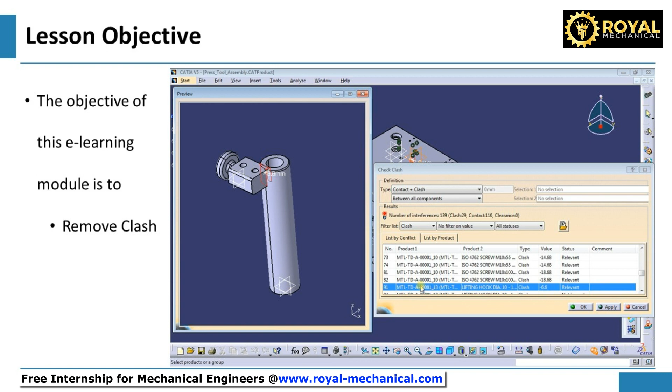In the previous e-learning module, we had identified two critical clashes. Number 1, remove clash between the locator pin and the stripper plate. Number 2, remove clash between the stroke end block and the lifting hook. First, let's remove the clash between the locator pin and the stripper plate. Let's create a relief hole on the stripper plate to remove this clash.

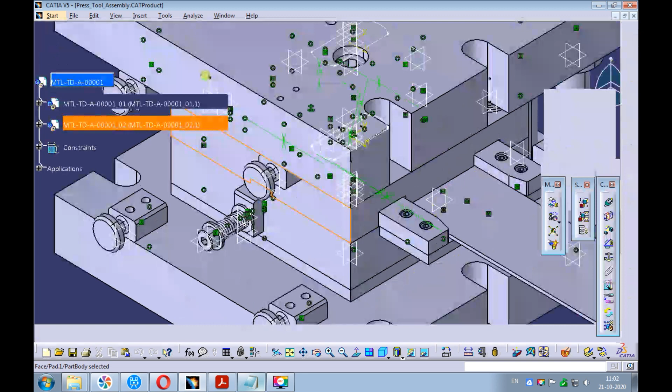Right-click on the stripper plate and open it in the new window. Swap the window to the press tool assembly. Right-click on the die plate and open it in the new window. Edit the definition of the locator pin's hole.

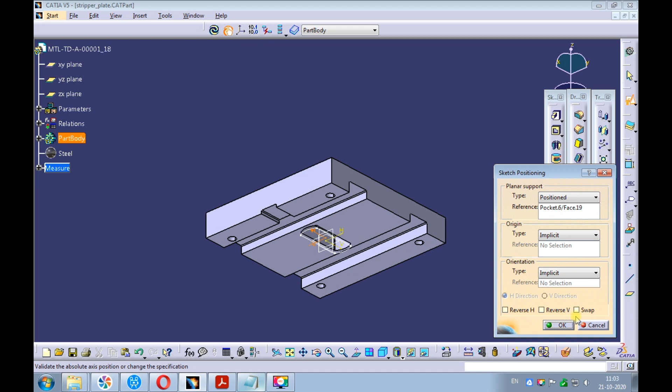Double-click and copy the horizontal distance between the center of the hole and the vertical axis. Swap the window to the stripper plate. Create a position sketch on the stepped surface of the stripper plate, which contacts the strip. Sketch a circle.

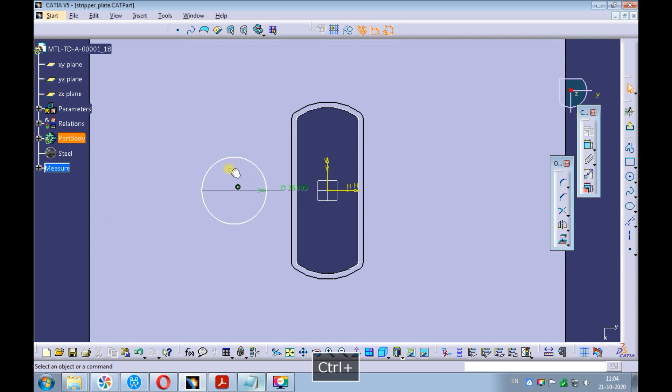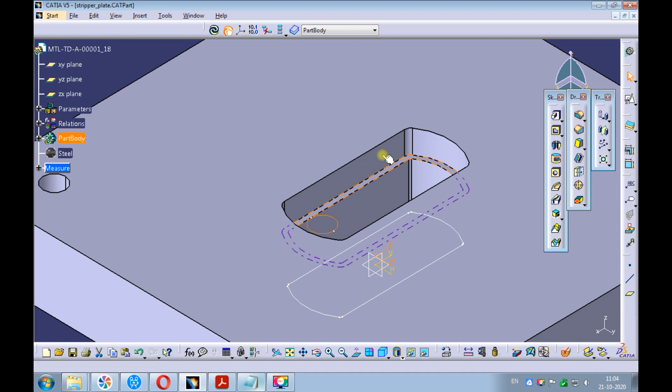Create a horizontal dimension between the center of the circle and the vertical axis. Update the dimension. Paste the copied dimension from the die plate. Make sure the sketch is fully constrained and exit the Sketcher workbench. Swap the window to the die assembly.

Measure the diameter of the locator pin. The measured diameter value is 16 mm. Measure the distance between the top surface of the strip and the top surface of the locator pin. The measured distance is 1.85 mm.

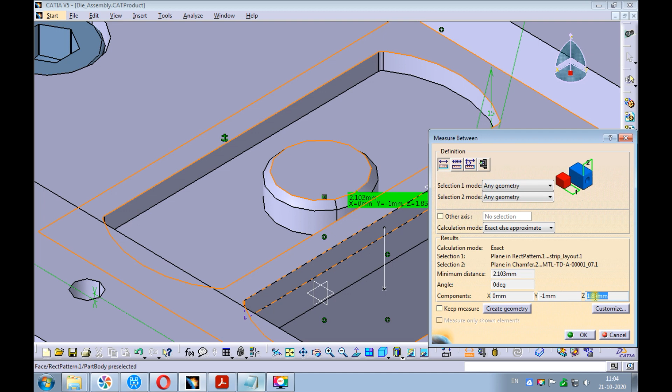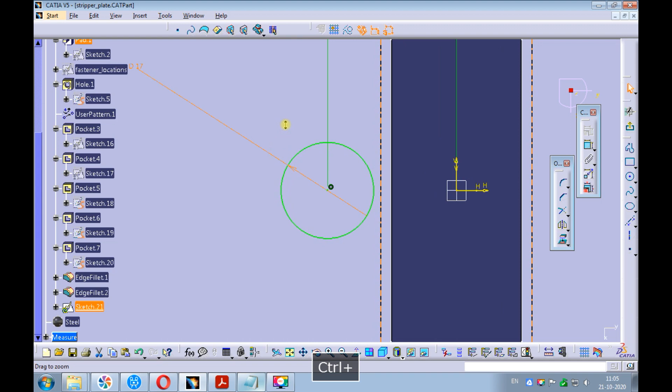Swap the window to the stripper plate. Edit the sketch created earlier. Update the diameter dimension to 17 mm, 1 mm more than the locator pin diameter. Create a pocket with a dimension option. Enter the depth of the pocket as 1.85 plus 0.5. Let's round off the value to 2.5 mm.

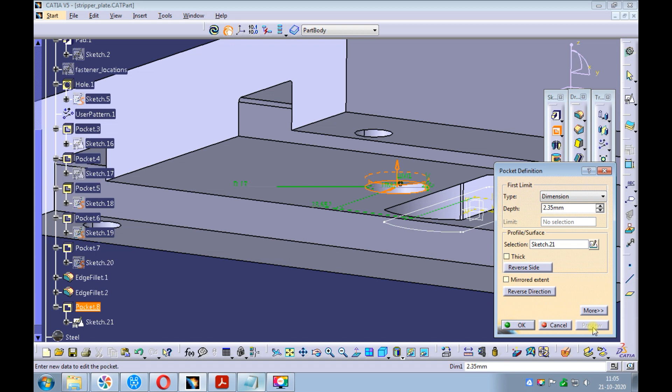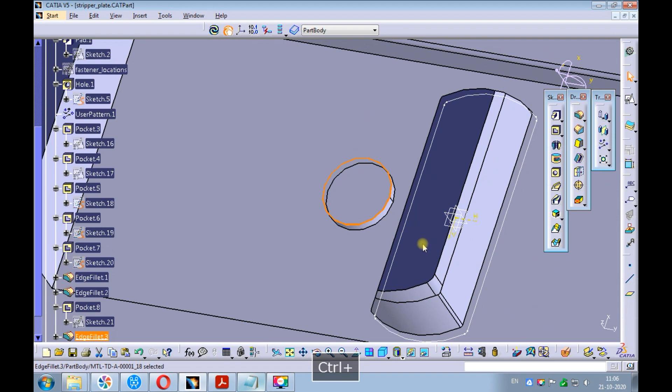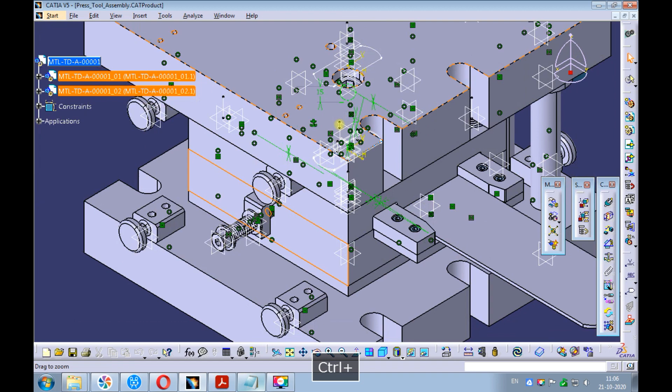Provide a fillet of radius 0.1 mm. Maybe we will increase the fillet radius to 0.2 mm. Set the view to isometric and fit all in. Swap the window to the press tool assembly. Pick the sectioning command. Pick volume cut on the result tab.

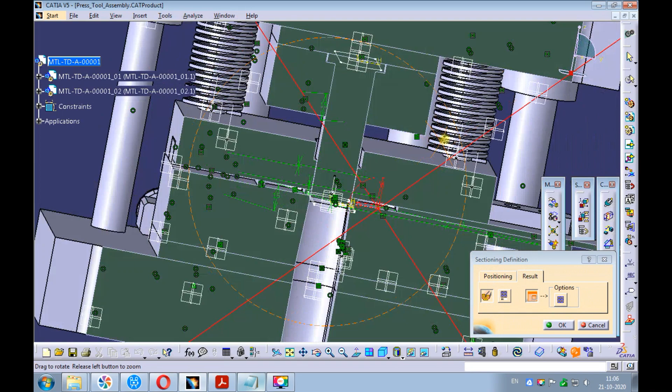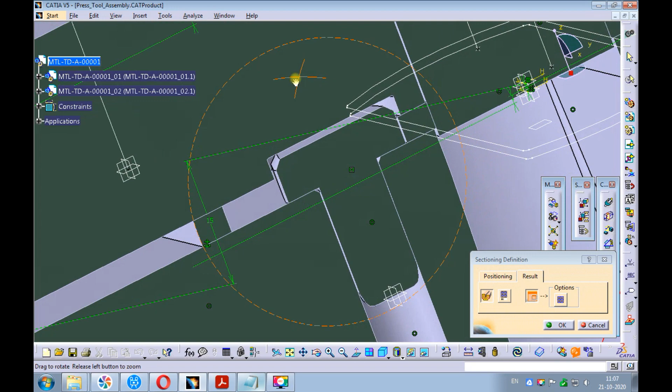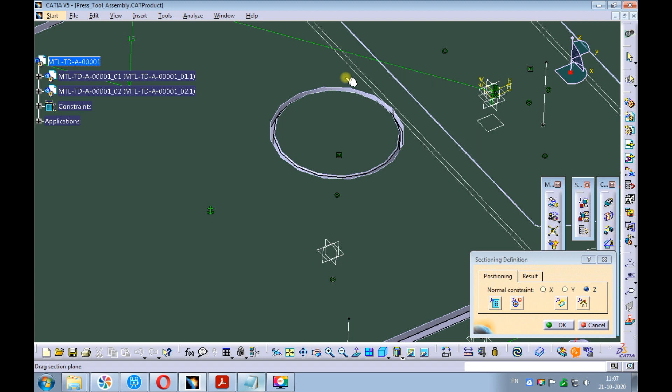Observe the clash between the locator pin and the stripper plate is eliminated. Change the positioning to the Z-axis. Observe the clash between the locator pin and the stripper plate is eliminated. Update the assembly. Set the view to isometric and fit all in.

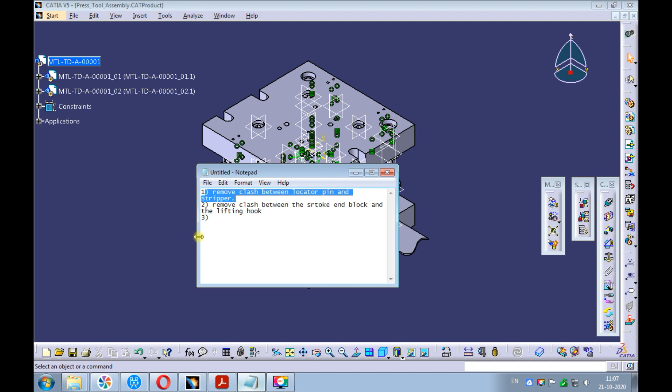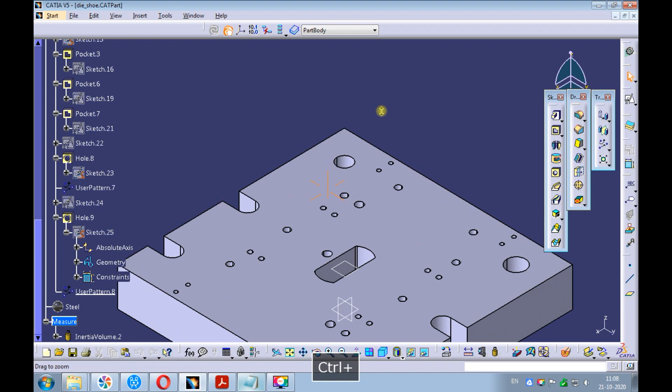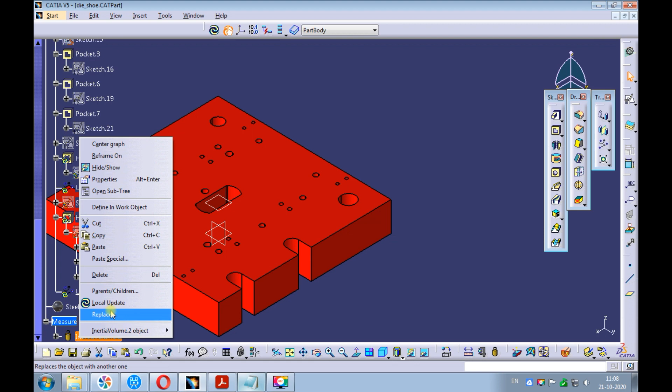Now, let's remove the clash between the stroke end block and the lifting hook. Let's move the position of the stroke end block slightly inside. Right-click on the die shoe and open it in the new window. Edit the sketch, which defines the position of the stroke end blocks. Update the horizontal dimension to 50 mm. Local update the inertia volume. Set the view to isometric and fit all in.

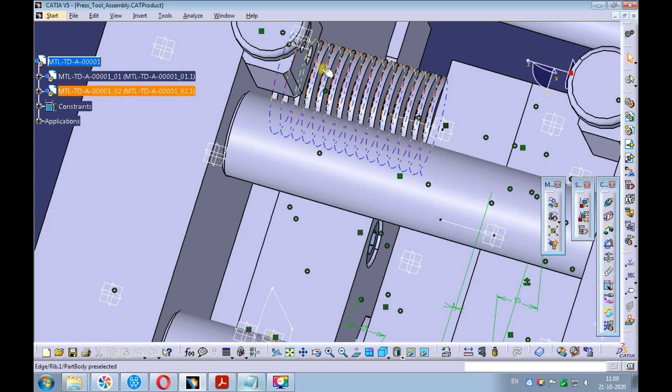Swap the window to the press tool assembly. Update the assembly. Observe the clash between the stroke end block and the lifting hook is removed. Measure the distance between the axis of the stroke end block and the lifting hook. The measured distance is 18 mm. Measure the radius of the stroke end block. The measured radius is 15 mm. So, the gap is just 3 mm. Let's increase the gap.

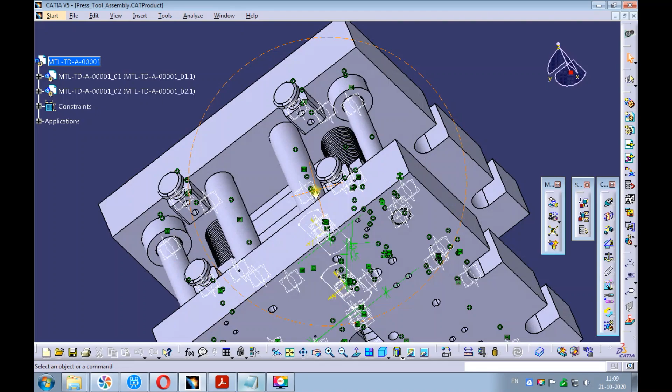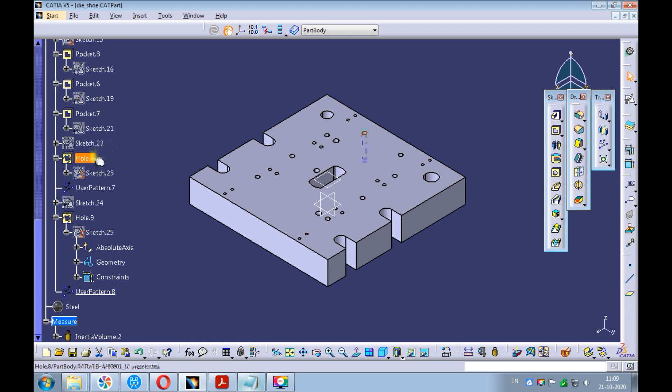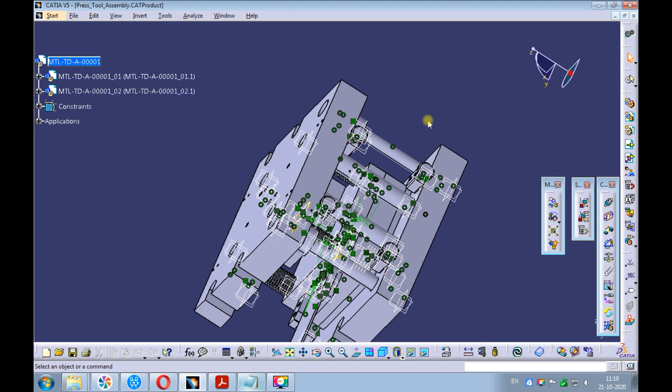Swap the window to the die shoe. Edit the sketch, which defines the position of the stroke end blocks. Update the horizontal dimension to 35 mm. Local update the inertia volume. Swap the window to the press tool assembly. Update the assembly. Set the view to isometric and fit all in.

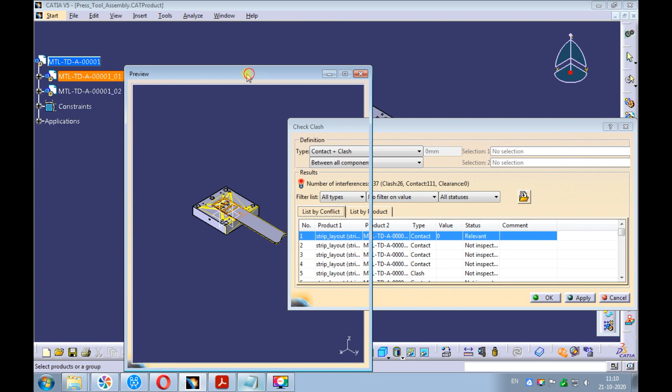Let's check the clash. Click on the Check Clash command. Recheck and validate all the listed clashes.

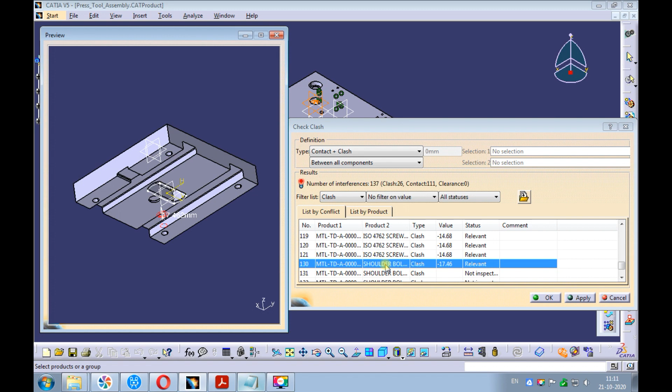We have successfully removed the critical clashes that we had identified in the previous e-learning module. Click on File, Save All, to save all the modified files in session.